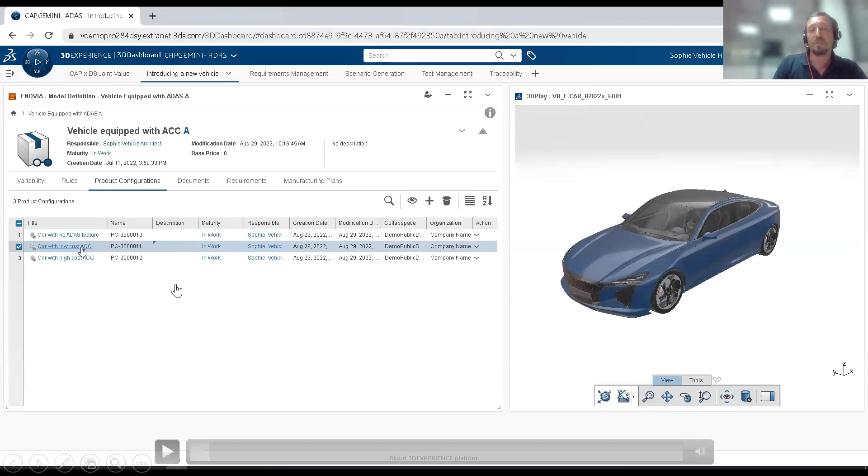We already have in the system different car configurations: one with absolutely no ADAS features, one with a low-cost ACC, and one with a high-cost ACC. The difference between low-cost ACC and high-cost ACC is the sensors in this case. We are only focusing on the sensors and the ACC, but of course we can add a lot more variations regarding the car, the wheels, the color, the chassis, and so on. Here you can see what we have in the low-cost ACC: low-cost camera, rear and front radar. It's called low-cost ACC because there is a low-cost camera.

We go into the requirements. We already have all the requirements captured in the platform—this has been done before. Here you can see the requirements for the NCAP, with different cases: a stationary target, a moving target, braking, the target going to brake. So we already have all the things regarding the vehicle under test and the global vehicle target. All the information is already taken into account, but we have much more requirements at the end.

So this is what we're going to see. We have operational requirements, stakeholder requirements, safety goals, safety requirements regarding ECUs and regarding ADAS—the requirements regarding the ADAS. What we're going to do is really link between the requirements we already have and our vehicle configuration. There is a need to create a new vehicle configuration and link this directly to the requirements which are already available. Then, along the whole process of defining the functional logical design, defining the software detail design, defining the sensors and the validation—everything related to validation—we will keep the requirements.

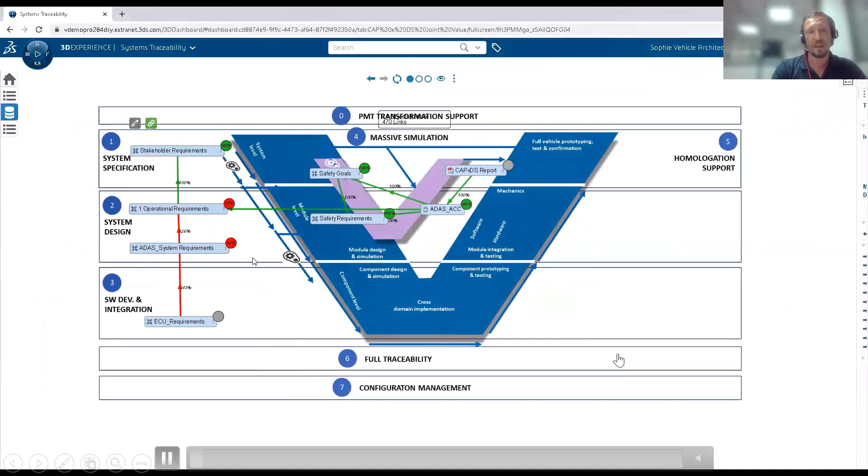So what you can see here is the full V model with the different steps we have and with the different requirements. So we have first system specification, system design, software development and integration. On the right side, you have everything related to validation and homologation.

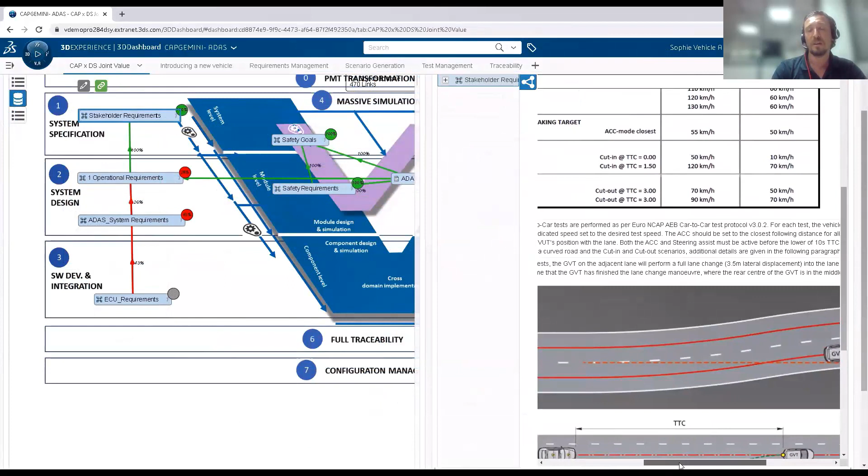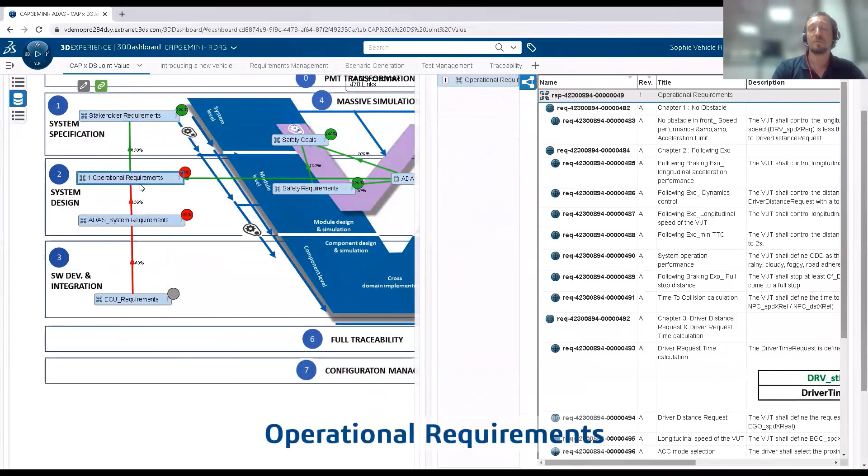Now we are clicking on the stakeholder requirements and we have access to all the requirements defined before. This is basically the NCAP protocol, so what is coming from NCAP, you can review it. You have all the information at the same place, all the requirements, operational requirements defined by the car manufacturer.

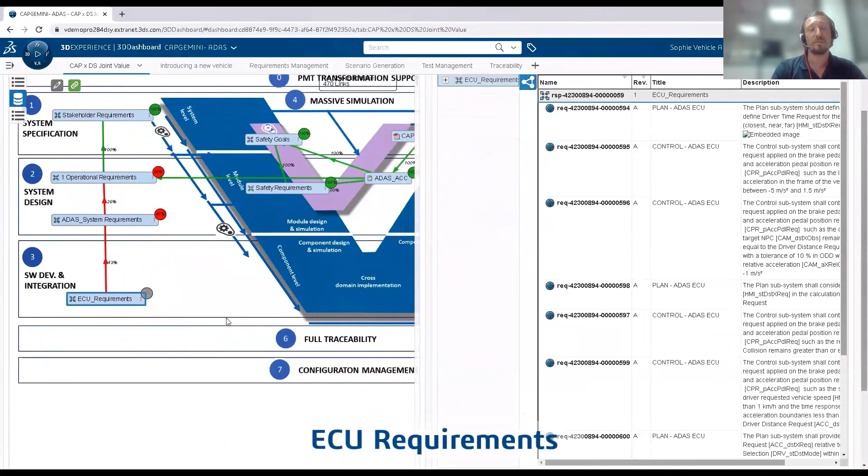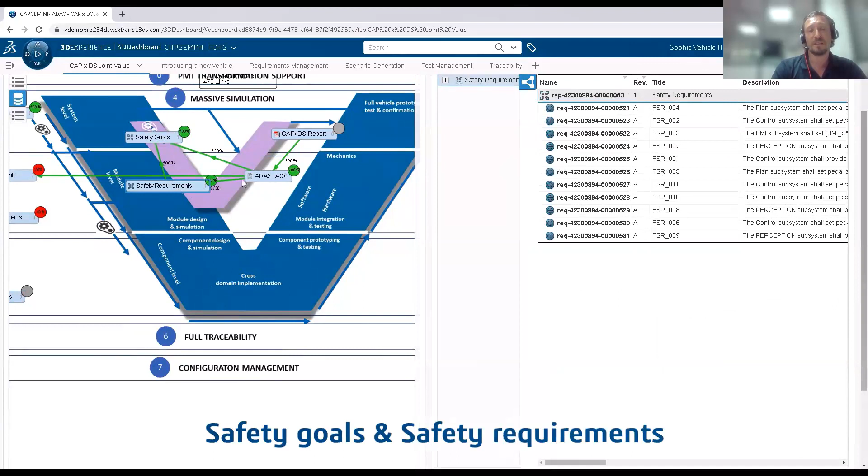The ADAS requirements are listed. The ECU requirements are all linked together with the traceability matrix. And we can see they are also linked to other things like the safety goals which have been defined, safety requirements, and the specific requirements.

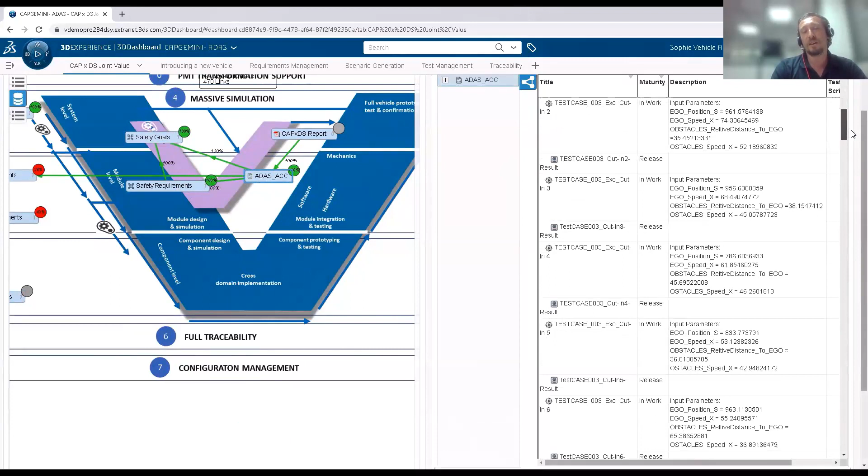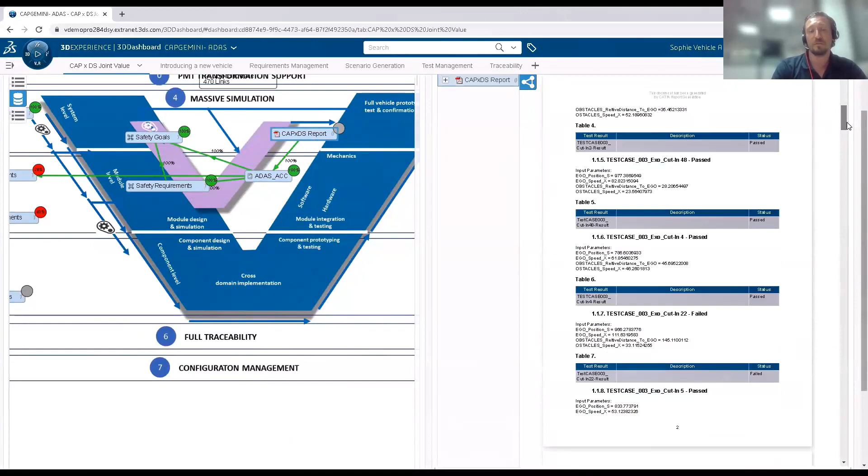So with the validation plan, which is already available for the active cruise control, we even already have a report. Normally at this stage you don't have any reports regarding the test and validation you did, but in this case we already had this, and it's something you can review if you have it. You have all information at the same place.

And now we are using CATIA Magic, and we are connecting CATIA Magic directly to the platform to get all the requirements in this environment, the SysML environment, model-based system engineering, with the different pillars.

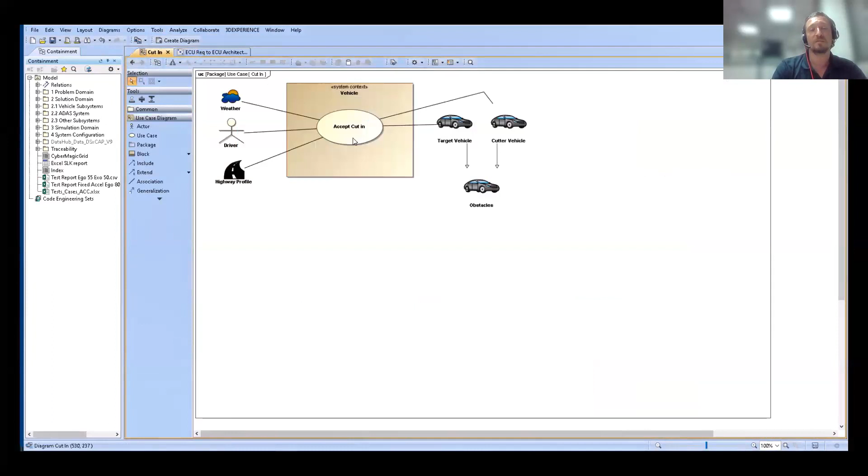So we have a system architecture for the full system, for the full car, we can have all kinds of information regarding the car. In this case it's a little bit simplified. We are concentrating on the ADAS topics, but everything is present, regarding the behavior, regarding the structure, the expectation, what needs to be done, what needs to be validated and so on. We also have, coming afterwards, all the information regarding the ADAS.

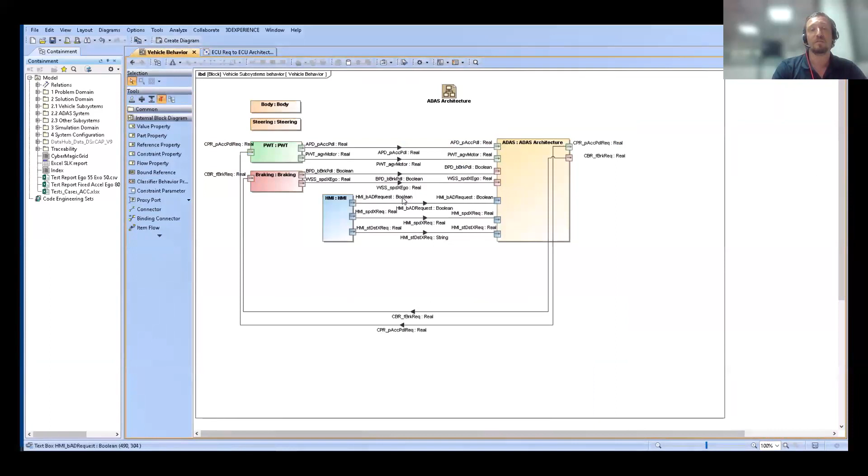So what needs to be done, same topic, problems to address, behavior to put in place, what needs to be done, stakeholder management, everything is already present there. And we also have the same for the ECUs.

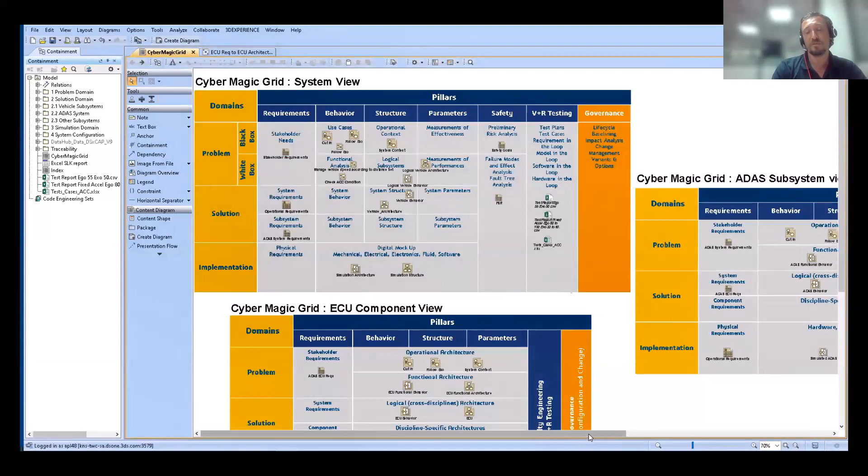So it's a little bit simplified. We could have much more boxes, but just to give you the overview or the impression, we have everything linked together with traceability between the system architecture, with the functional logical design that has been developed, and with all the requirements.

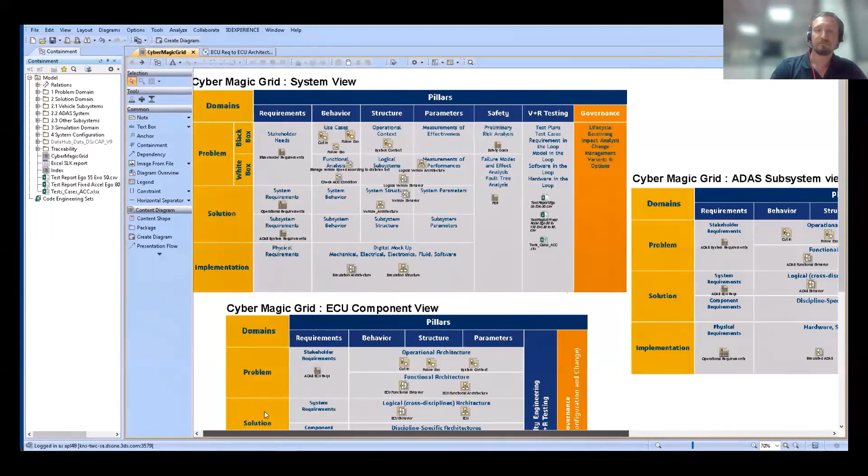And the value proposal is of course end-to-end traceability. So you have full traceability, full link between your requirements and your system architecture. And you have the possibility, of course, to model everything in SysML, model-based system engineering, before you go directly into the software design.

And you can directly connect, of course, CATIA Magic with the tool you're going to use to create the software code, embedded code. So this is the next step.

In this case, for the sake of time, we decided not to show any video. It's not particularly spectacular. We have a demo with Simulink in this case. We have created the code in Simulink, and everything is directly linked to the requirements and to the system architecture. I'm not going to show it to you, but if you want, this is something I can show at any moment.

And then I will say maybe for the next demos, I will ask you, Sama, to take over, if you don't mind. Sure. Yeah, so maybe before presenting the demo, please don't hesitate to put your question in the chat. We'll try to answer all the questions after the presentation.

Coming now to the impact analysis, and the powerful analysis from requirement to model and validation. As I mentioned in the introduction of this demo, we are facing a global delivery model. So we're working to develop an ADAS system. It's not a small team working in one geo, it's a global team from different geos working together. It's really very important that we ensure the end-to-end traceability between the different layers of development, and we will try to show you an example in the video that we will share just now.

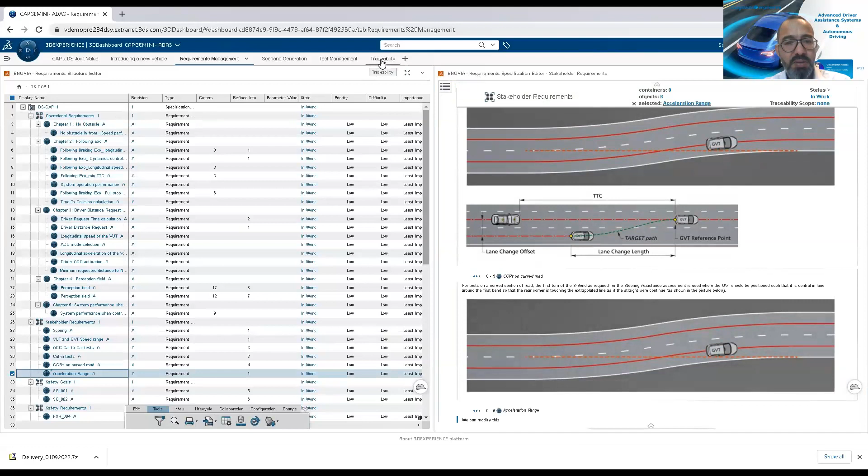And when we start to modify, as you see in the example, a requirement at vehicle level, like what you see here, we are trying to modify in real time on the right, writing a new requirement. This is very important, that all the stakeholders taking part in the development can be aware in real time. And this is what is proposed by the platform to ensure this traceability. You will see, so we are modifying a requirement at vehicle level.

You will see the impact directly with the connectors between the different systems, between the vehicle system and ECU model. You see the impact, the impacted requirement, to be able to ensure that all the stakeholders will optimize their development based on that. This is really very important, and we go until the model ECU layers.

This solution or this service is bringing high value for our client, because we will increase the robustness of the development, and we will ensure, as I mentioned before, collaboration between the different teams all around the world.

So the value proposal here is detailed impact analysis with a visual representation. Very interesting also for people to understand quickly what we need to modify. And as I mentioned, the multi-domain visualization starting from the vehicle level until the ECU and the software level.

Now let's talk about in-development testing. When we develop software, as you know, it's an agile process, and virtualization and simulation take a big part now in this process. We represent it with this small V cycle in the classic V, but as you know, we are in agile mode with local loops to optimize the development during the process.

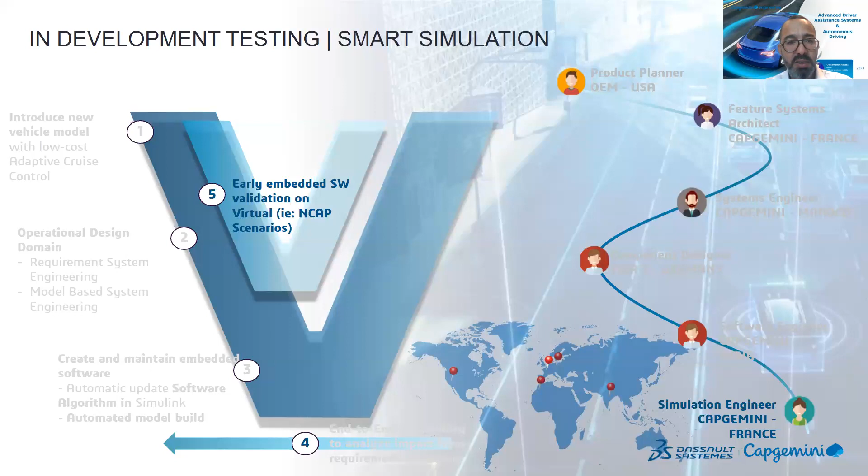Here we are talking about simulation engineers who will create a virtual environment to support the development. Let's see a quick video after.

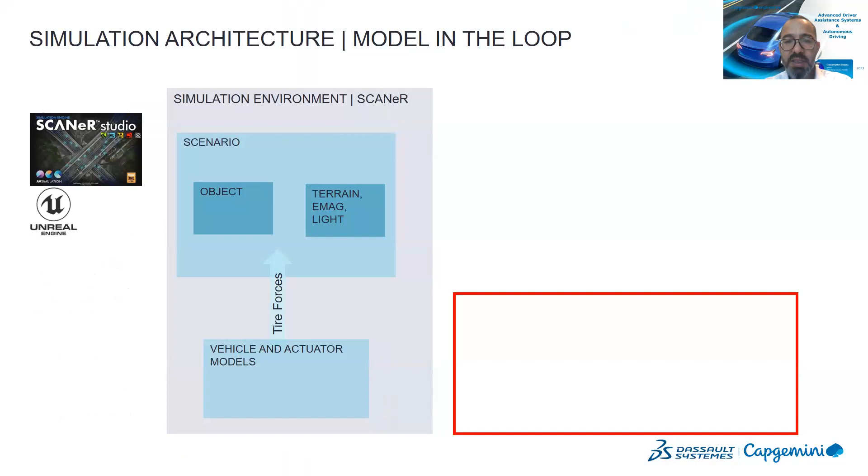So when we talk about simulation, classically we are talking about model-in-the-loop platform. You can click, please adjust to display all the layers. In the classic world, what we are doing is creating a simulation environment based on SCANeR with different objects, terrain, roads.

Modelization, we are creating scenarios, static and dynamic. The output of the scenarios is connected directly to the ADAS system development, the model, where we find different layers around decision, planification, control and command of the actuators, and so on. So what you see down on the right, in the red boxes.

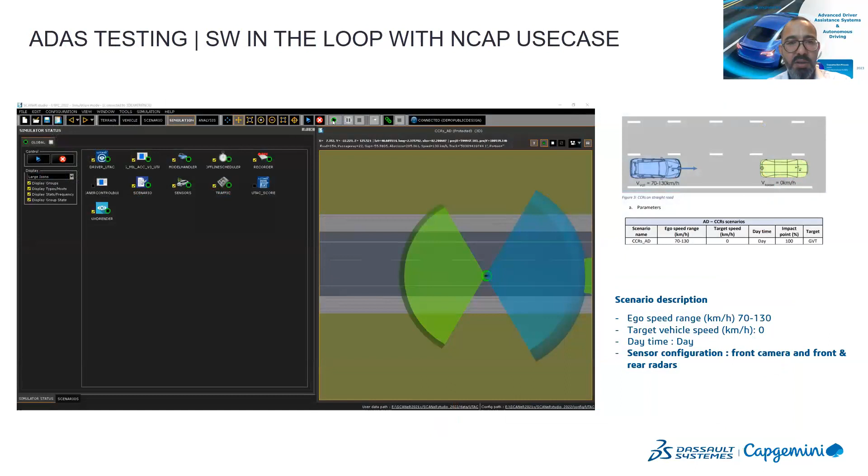The model or the system, I can get back here. So the model is connected to a vehicle actuator model or vehicle dynamic model, and we are creating a loop with the model in the loop platform. This is the classic one.

Concretely speaking, instead of sending perfect objects to the system model, we are connecting the scenario and the virtual scenario to the software of perception, and our system model will consume directly the outputs of the software. This way, we will put the software in the loop, developed in C, C++, Python, or wherever, and we will ensure validation of these software bricks with this platform.

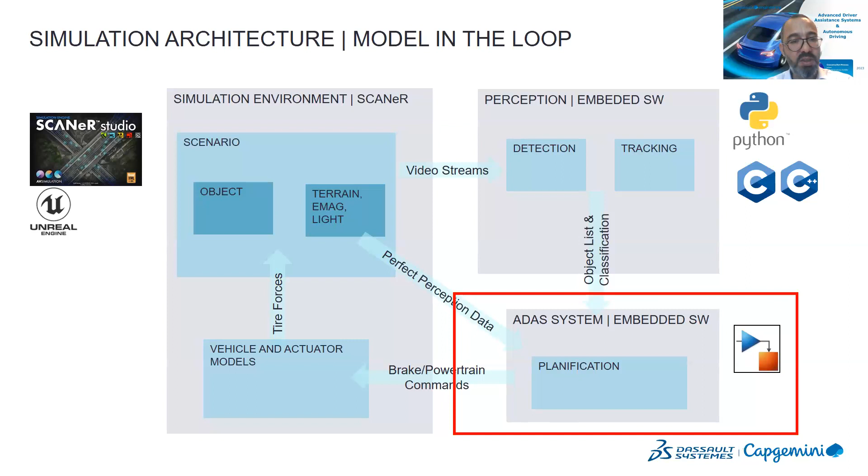It was really very interesting for our client to anticipate as soon as possible in this development cycle the evaluation, the assessment of the maturity of the software, thanks to this virtual scenario. And we will see on the next slide a concrete example.

First of all, here, do you want to say a couple of words regarding the scenario description?

So here you can see the scenario description. We have an ego vehicle with a speed range between 70 and 130 kilometers per hour, and a target vehicle which is not moving. It's daytime, and the sensor configuration is a front camera and front and rear radars.

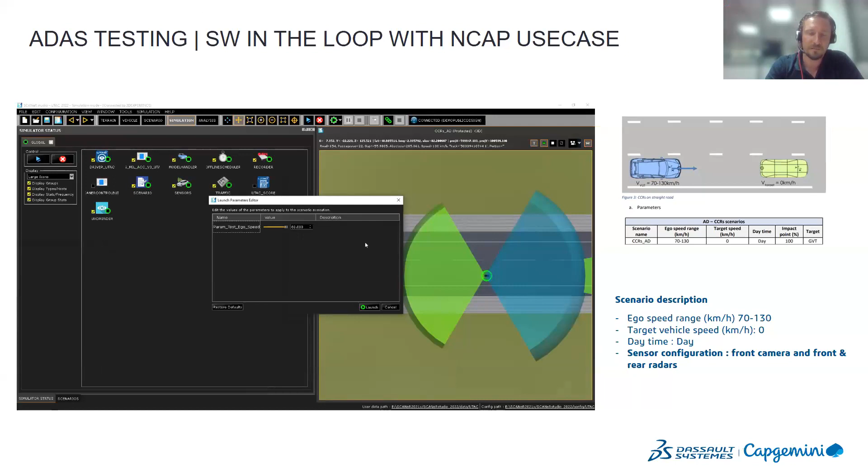Sorry, Oussama. Yeah, please go ahead. So here we are launching the development of the scenario, or the virtual scenario.

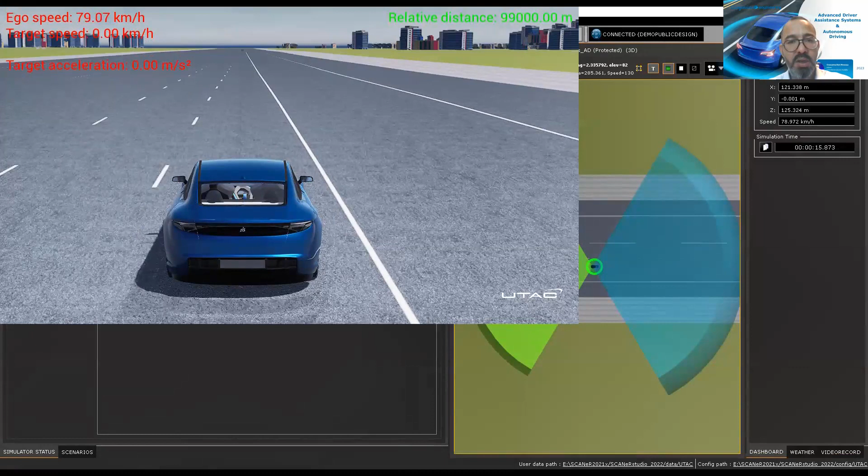Here is the example of our Euro NCAP scenario, the classic one, just to show that with virtualization and simulation we are able to create a functional scenario, but we are targeting and covering all the standards and regulations, for example based on our Euro NCAP scenario. As you see here, it's a simple one, but it shows the type of scenario that we can generate and simulate with the platform.

We cannot hear you well, Oussama. Maybe you can try to speak a little bit closer to the microphone.

Okay, so it's better like this? Yeah, it's better. Thank you. Okay, so we can move to the next one.

Just a couple of comments regarding that. You can see here the logo of UTAC, a French homologation body we have been working a lot with. We have all the NCAP scenes necessary directly into the software, with different libraries for different countries: Japan NCAP, Korea NCAP, China NCAP, India NCAP, Euro NCAP, Australian NCAP. They are all present and directly available in the software.

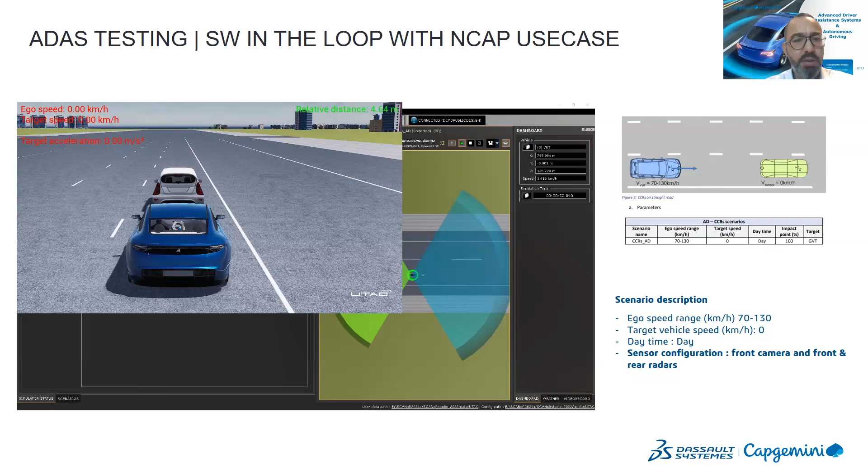Thanks a lot, Ariel. It's very important to cover all the scopes. On the value proposal, we are mentioning the early NCAP performance system, but it's including all the standards mentioned, with a software/ADAS-in-the-loop validation approach.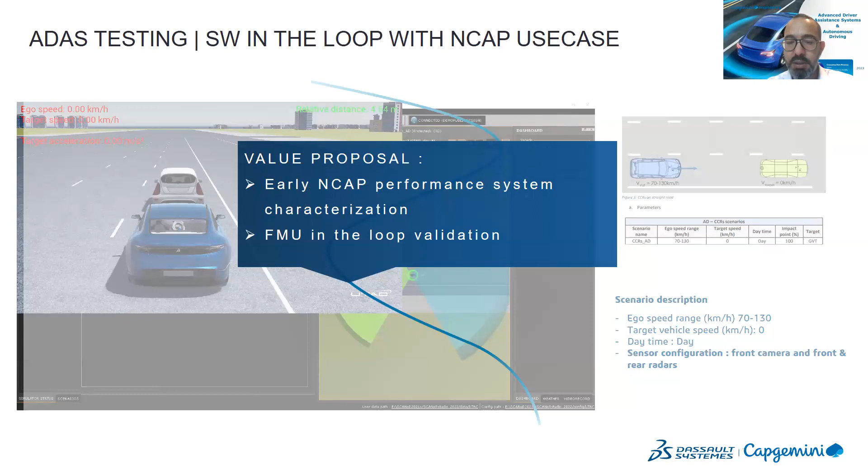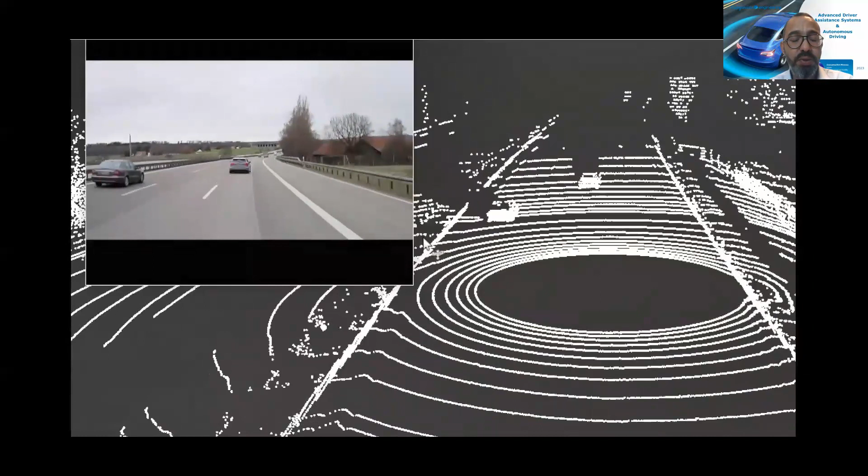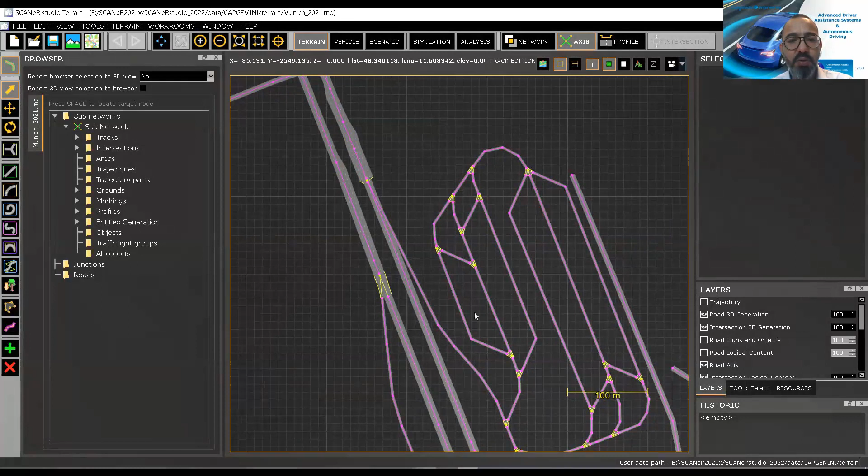In the next slide, we will talk about the digital twin. The digital twin is very important for the development process, because we create a realistic scene. What you see in the demo and validation is a real physical scenario collected with a point cloud and camera frames. We use SCANeR studio combined with OpenStreetMap and HD map data to extract information from road characteristics, like the number of lanes, intersections, road signs, and objects.

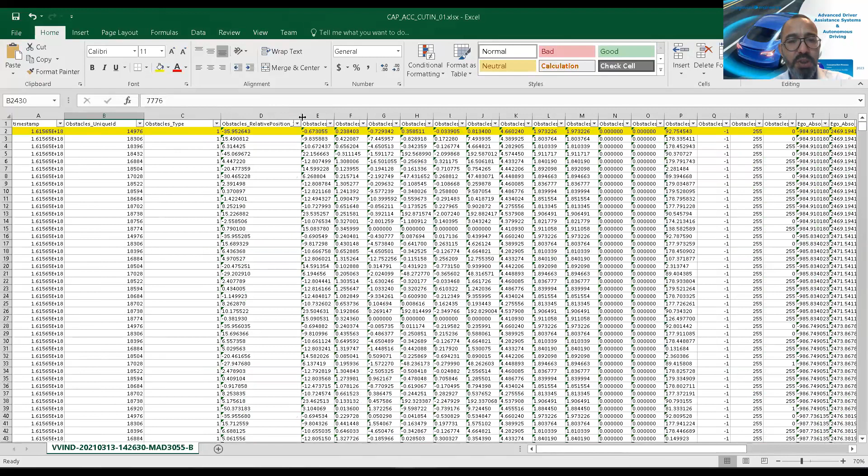This extracted information is combined with assets developed specially to create the digital twin of the scenario you've seen before, in terms of object detection and speed of objects around the ego vehicle. We combine all this information with SCANeR studio to create a digital twin, which is a dynamic copy of the physical scenario you've seen before. What we obtain is what you will see here on the screen.

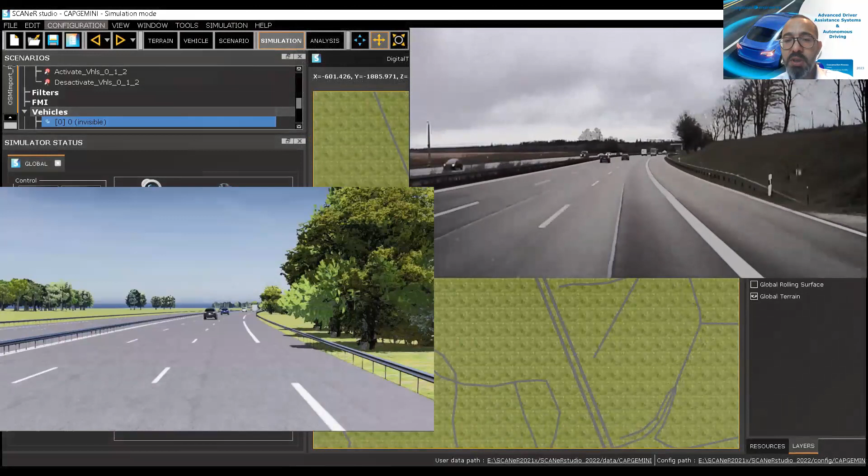We have the physical scenario on the top right, and the virtual scenario reproducing all the configuration, but also the dynamics with the different objects, with very high fidelity. This is an example of what we can do with this digital twin approach. With the virtual scenario, we can vary the parameters, add more objects, more events, and extend the coverage of the validation plan.

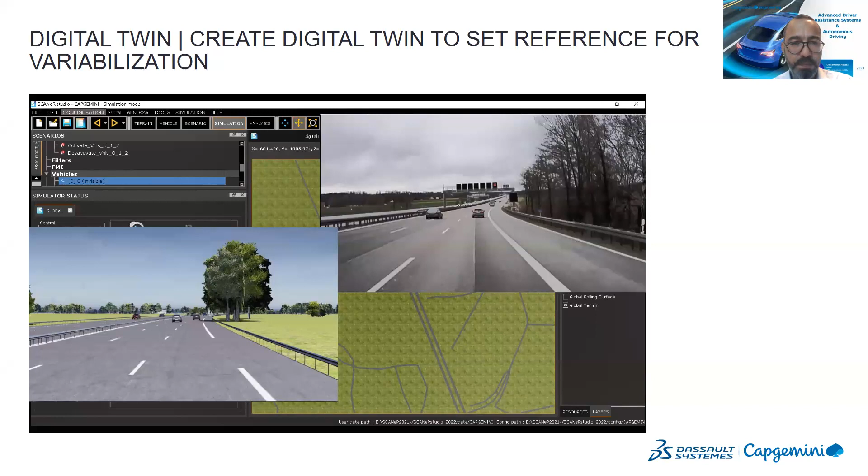Creating confidence in the system also means testing corner cases. Starting from the digital twin in nominal condition, we create different contexts: sun glare, snow, rain, and night conditions. We put this extension of the nominal scenario in the loop with the perception software. Let's stop the video just to explain quickly.

What we see here, the green boxes, is the perception based on the software. For example, in the snow driving scene, we are detecting the object in front of the car with the camera. It's the same case for the night driving scene and the rainy driving scene, but not for the sun glare scene. This means our software is not performant in this condition, and it is not able to track the car in this situation.

From that, we loop with the software developers and the data team to collect data and create new scenarios to optimize the perception software to ensure safety in this condition. If we succeed, we progress on development. If we are not able to, it means we need to deactivate the ADAS feature in this condition. Let's progress through the video quickly, Ariel, for everyone to see the limits of the software's performance regarding the different conditions.

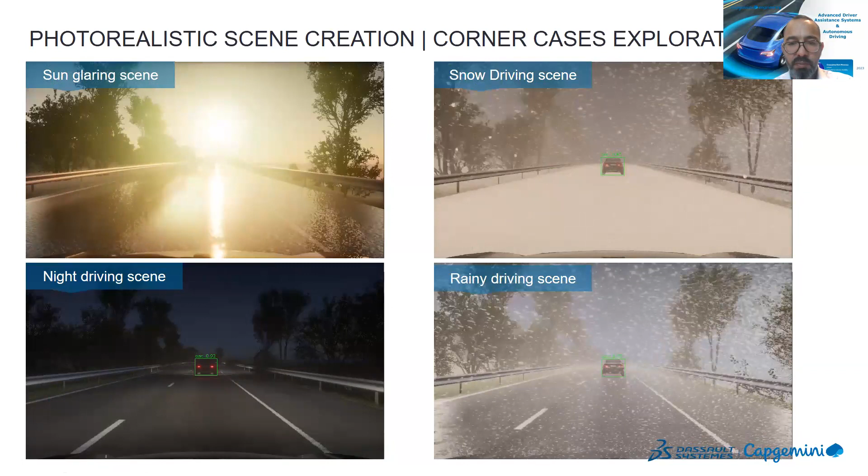One important thing is the high fidelity, as you see. We have representativity for the different scenarios, ensuring robustness with the safety goals. We are working on an optimization process between physical testing, data collection, and the virtual approach, all under safety regulations and standards, ISO 26262 and SOTIF assessment.

Thank you, Usama. So I will take over again. Now we're going to talk about the full integration massive simulation.

So how we can generate a lot of scenes and scenarios. In our workflow, it's done at Capgemini France in this case. So here again, there is a video.

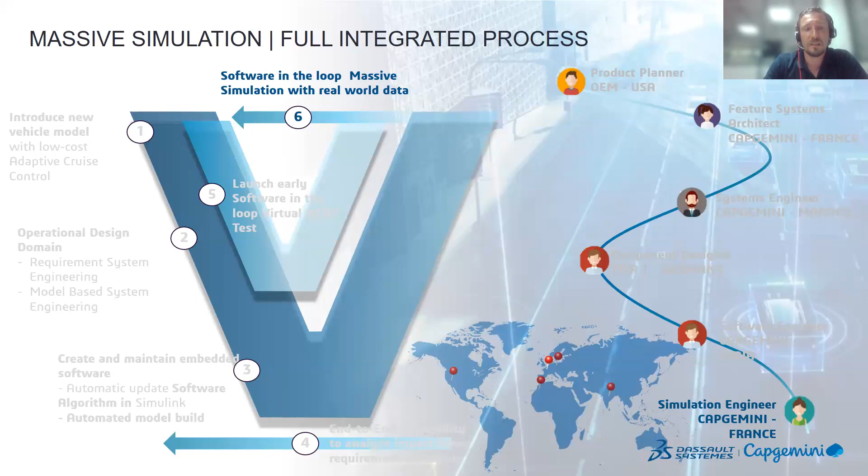What you can see here, we already have 7 different test cases defined in the system, related to NCAP. We're going to use an asset from Capgemini to create from those test cases a lot of different scenarios. This is what you are seeing with Process Composer.

This is an app called Process Composer, and it's going to call the command developed by Capgemini - the asset, the script - and then it will generate automatically all the different scenes and scenarios we did. It's really strong, it's fully automatic, and it should help you.

It helps our customer really to win time, to save time, let's say. So we have everything which is already created.

So we're going to look for the test cases. We're going to find again, so we have 9 assets, but 7 test cases. And we're going to open, so we have a validation plan which is created. We're going to use the V&V strategy app.

So we can see the different, what we have: Exo Braking, Exo Cut-In, cutout, and so on, oncoming vehicles, so different test cases.

Afterwards, they are created, all the scenes and scenarios we have, and we will be able to run directly from the platform, use SCANeR and run all the different scenes and scenarios with massive simulation. The value proposal in this case: this fully integrated asset from Capgemini ready to automate virtual scenario

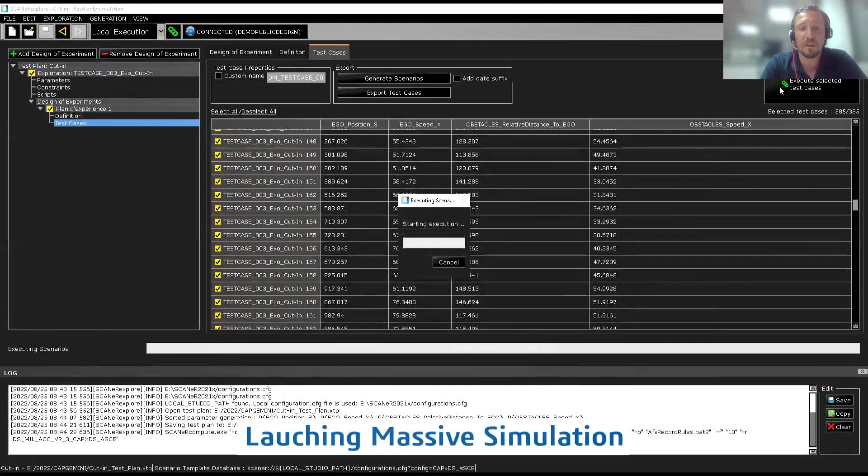So they are all here, and we will execute them. So we launch massive simulation, and everything will be solved.

And what we have here is a particular scenario. In this case, what we are doing could have been done with Simulink. We decided to do it with our own solution, which is ControlBuild. So in this case, we are testing the control law for the vehicle.

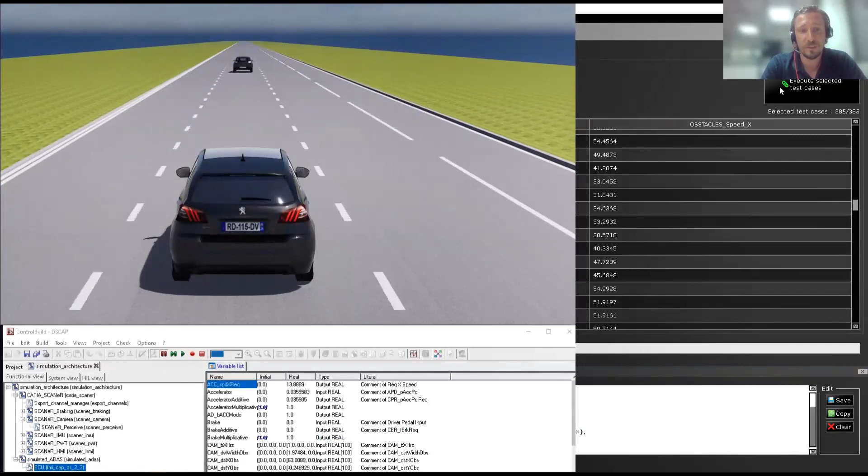It's not spectacular - maybe you're not going to see that there is a big distance between the 2 vehicles, but there will be a braking at the end. So this is what we're going to see a little bit later.

And then we will save the simulation. So everything what has been done in SCANeR directly in 3D experience platform. And this will be again linked to all the requirements and the system architecture.

And you will be able to retrieve all the information you need. For example, the validation plan linked to the requirement and product configuration.

Here you have your test cases. And if you click on the plus, you will see all the different scenarios we have. So we're going to take one of them.

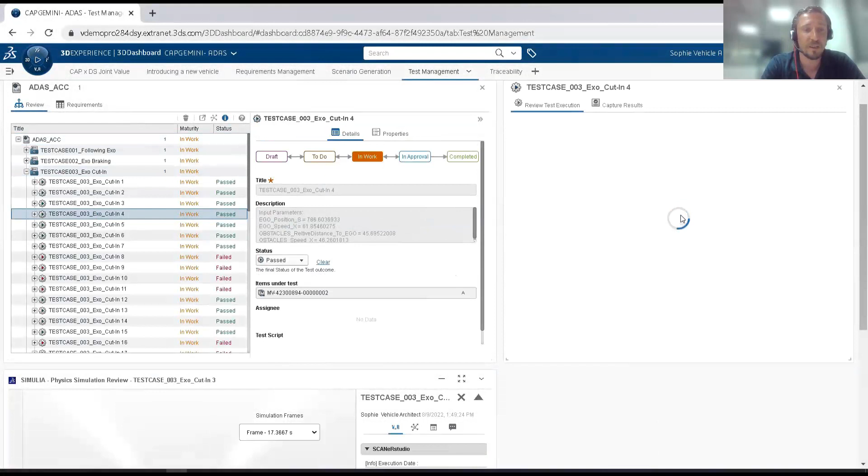So you see it's passed, we have passed and failed. In this case, this one was okay. You can retrieve all the conditions of this particular scenario.

So what has been done, and you can view everything. You can do it directly in SCANeR, or you can do it directly in the platform, and you will retrieve all the information. So everything what we generated in SCANeR will be available in the platform in this case.

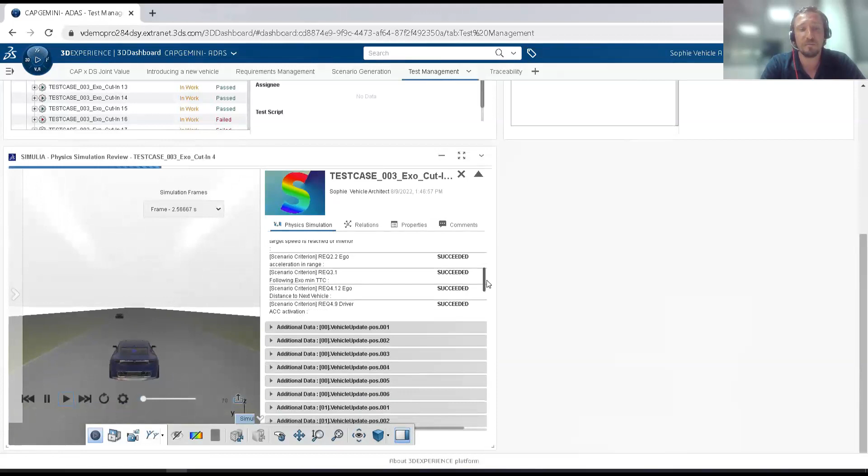And I think we will even see a couple of diagrams. So here first one - I think the next one is at the speed in this case. And you can see there, so the speed is changing. So there was a braking in this case.

So you are really able to retrieve all what you did and to analyze everything directly in the platform, and even to do a lot of trade-off studies. So it's possible.

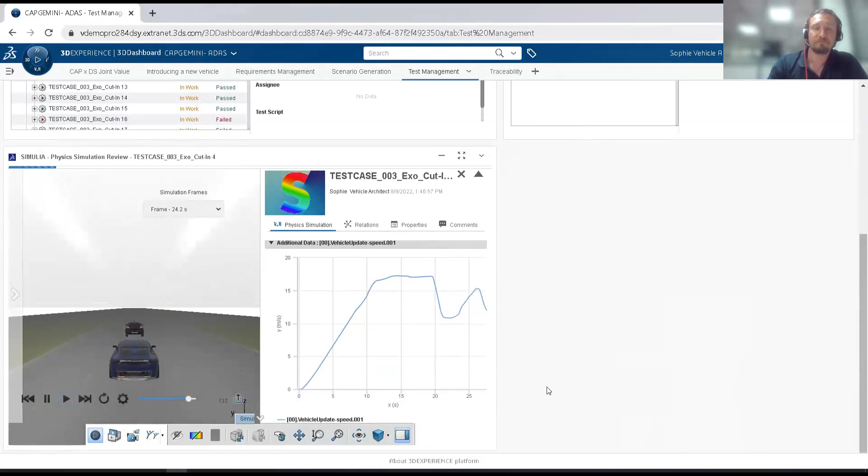And we are still using the same dashboard as at the very beginning. It's really the central dashboard for all the stakeholders, for all the disciplines, with all the information. Everything is linked and everyone has access to the same information.

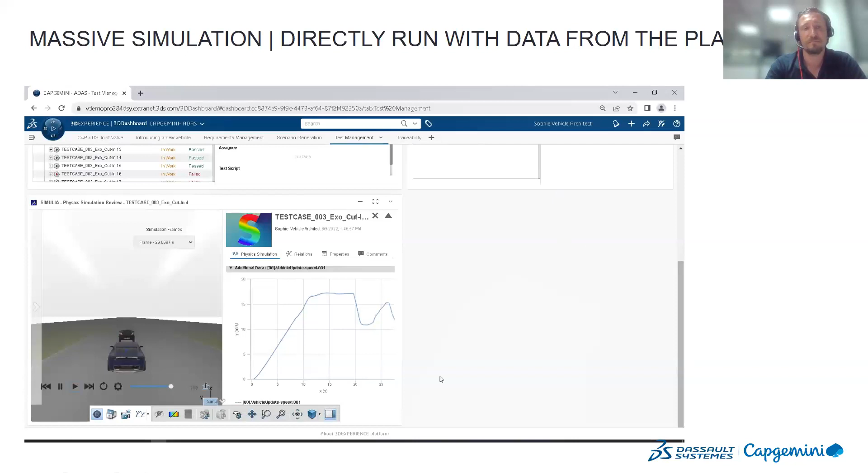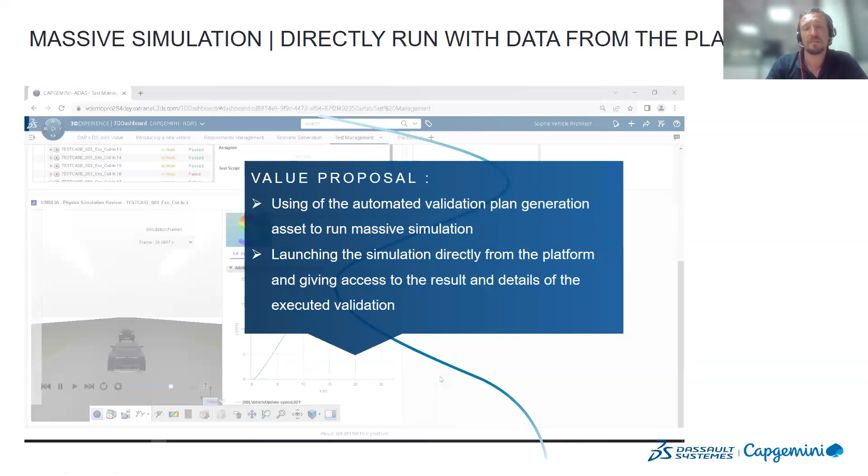So using the automated validation plan generation asset, as already mentioned several times, and launching directly the simulation from the platform and accessing the results and all the details directly afterwards in the platform.

So, the last step is regarding end-to-end traceability. We're going to have a look at that, and we're going to see how to generate a report. We'll retrieve all the information.

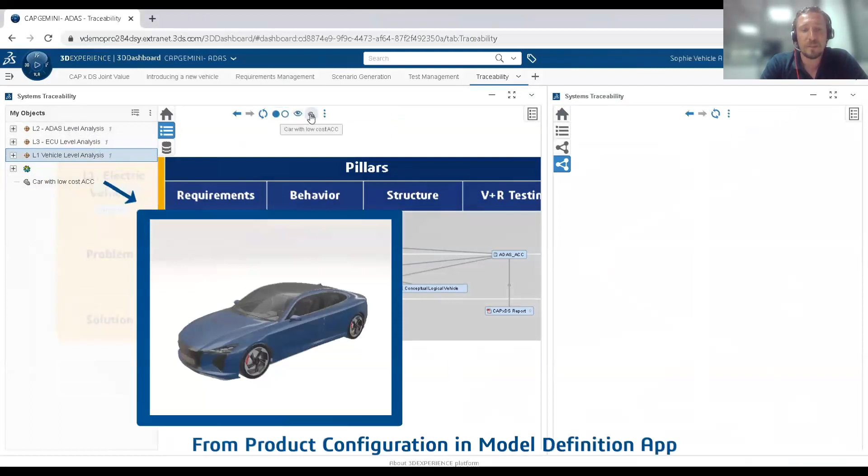Everything is available for our different levels, as mentioned by Usama. So we're going to take the car with low cost ACC. We have the information regarding the product configuration here, the vehicle architecture in this case, and every time we'll be able to retrieve all the information regarding the requirements, the use cases.

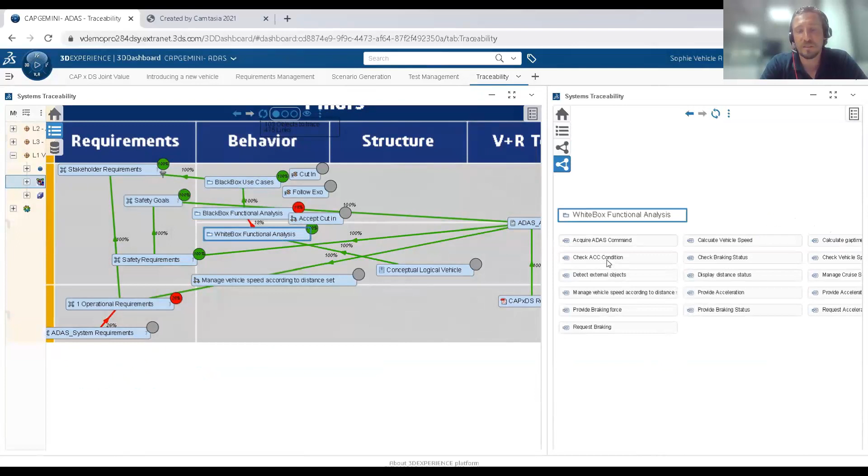So what the system is supposed to do, in which conditions. We spoke about ODD, everything is available. This is regarding the functional behavior of the system, everything that needs to be done has been modeled and everything is available.

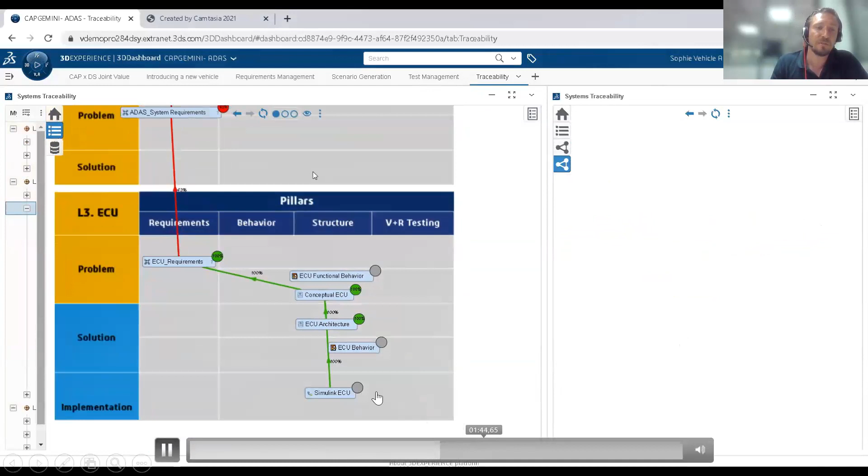Maybe I'm going to speed up a little bit. That's one, so it's every time the same. Here we have L3 with the ECUs. We have everything regarding the systems which are interesting for us.

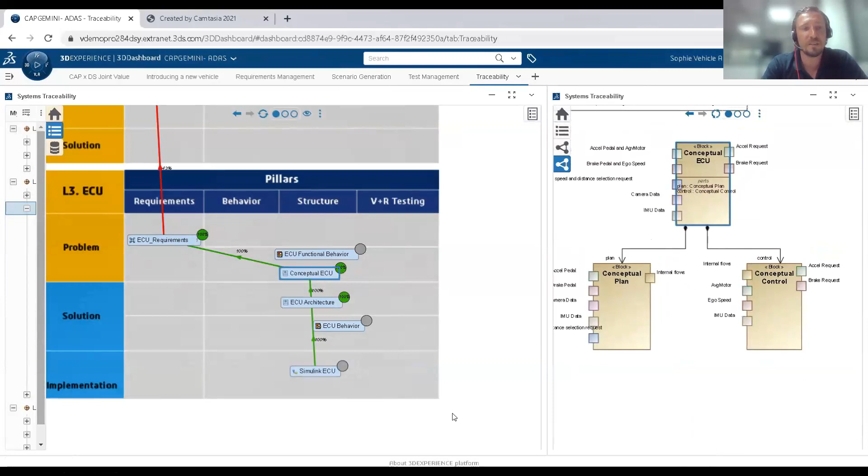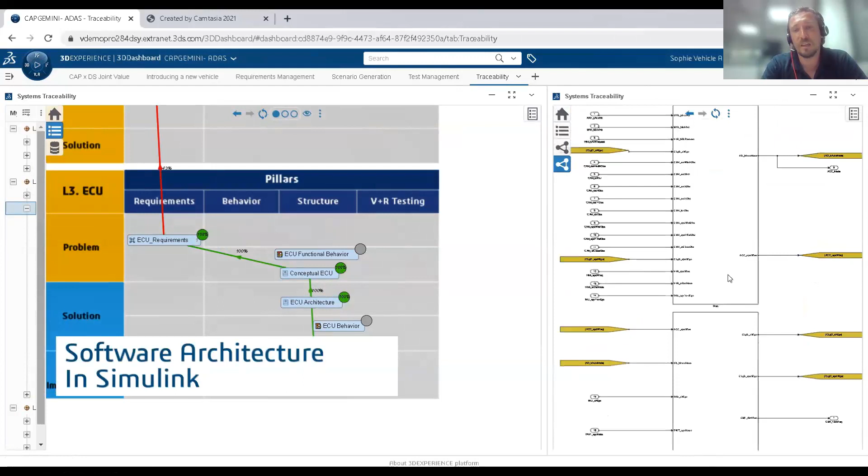We decided in this particular example to have a look at the full vehicle system, the ADAS system and the ECUs, and we have all the information, including direct access to Simulink, to the diagrams in Simulink, and the full embedded code which has been generated.

I think at the end we have something like how to generate a report. You can, of course, automatically generate reports that you're going to use to make decisions, to discuss with colleagues, or even to provide to the homologation body you're working with.

And if you're working with partners, for example if you're a supplier working with an OEM, you can send all the information automatically. So automatic report generation as a value proposal.

From the platform, there's a link to the configuration, link to the other tools as we saw, for example to Simulink, and requirement validation status. Everything is available in the platform, and everything is related to NCAP in this case.

I think we are nearly at the end of the presentation of the demos. It was really to give you an overview about what we can offer, what we have created with Capgemini, with the different assets and tools we are using, the end-to-end approach.

Of course we didn't go into detail on the validation. It was software in the loop, but we can have a lot of different things. We can have model in the loop, hardware in the loop, even driver in the loop or vehicle in the loop. So we have a lot of possibilities.